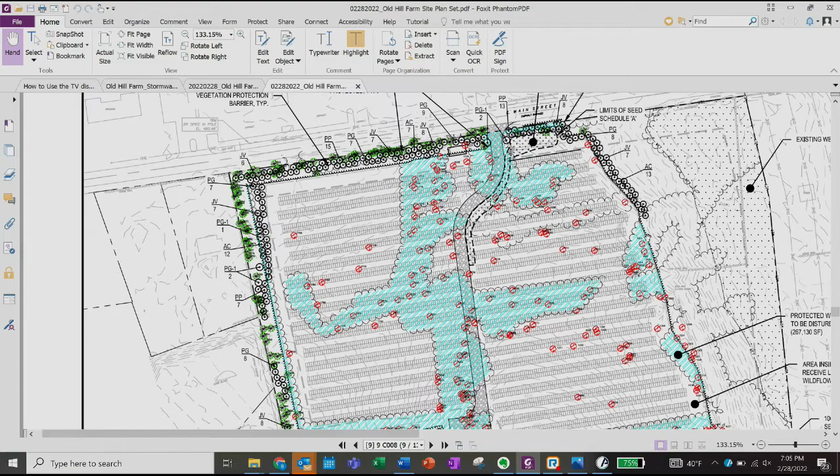This came out of a discussion with John Tegeter. We spent a lot of time going through the site sections with him, looking at the site sections, figuring out the height of trees that we would need, and what kind of trees.

So in that corner, we did a site section where there's an enormous amount of trees under the power lines, like 76 feet of them, that sitting here today would probably block that view. But in talking to John, we're trying to accommodate for the what-ifs. What if those trees fall over? What if they die? Who's maintaining them? So we are looking at needing greater height in that area.

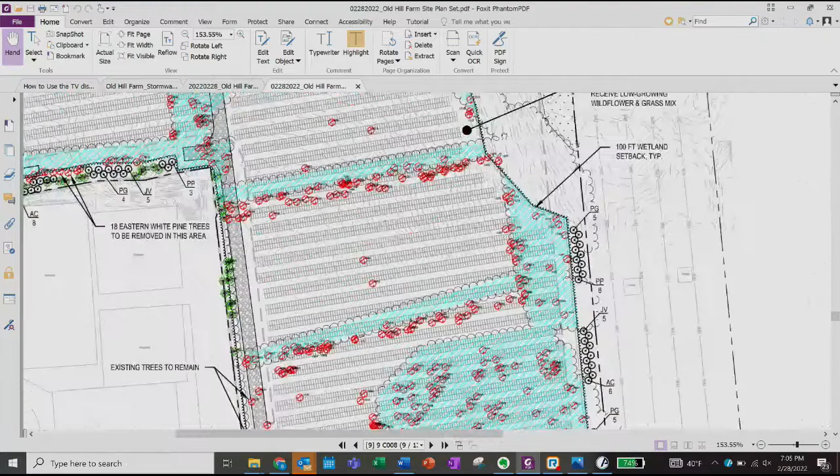So we've added the green giant arborvitae, which grows at approximately 18 inches to 2 feet a year, and we're proposing to plant 12-foot trees, which should hit a height of 21 feet in about 5 to 6 years. That's down in the corner over by the intersection of Hill Boulevard and Route 6, basically behind the shop where the Carvel is.

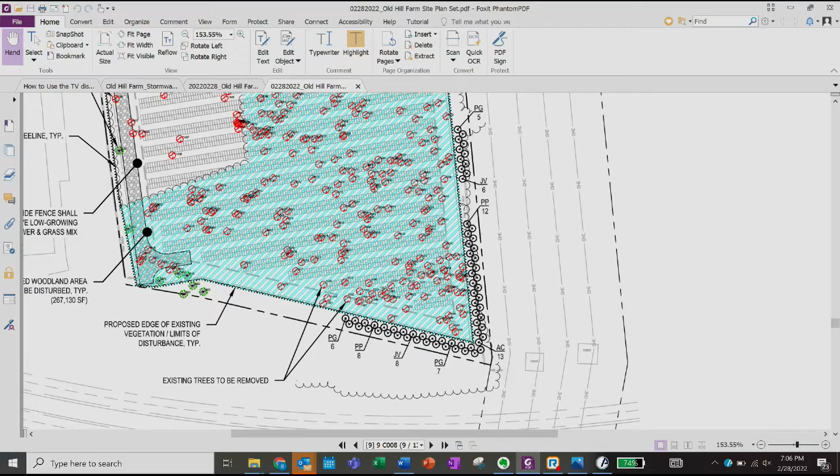We've also talked about moving some trees on the outside of the fence, at the wetland buffer, because that will screen the fence. The privacy fence is 7 feet, but we're also thinking of planting much higher trees there too, 8 to 10 feet, to screen that, and perhaps put some native shrubs in front of those trees to soften that, because that's close to - if you're standing on the bowling alley parking lot looking that direction, that's what you would be looking at. So we thought it'd be better to move the trees on the outside of the fence rather than the inside, so that screens the fence from the property.

But that's a long way of saying that we spent a fair amount of time with John going through the various site sections, and we have, I think, one more where we're just going to go there in person and see what needs to be done. And we have a range of native shrubs plus the 4 that are in our original planting, and now we've added the green giant arborvitae.

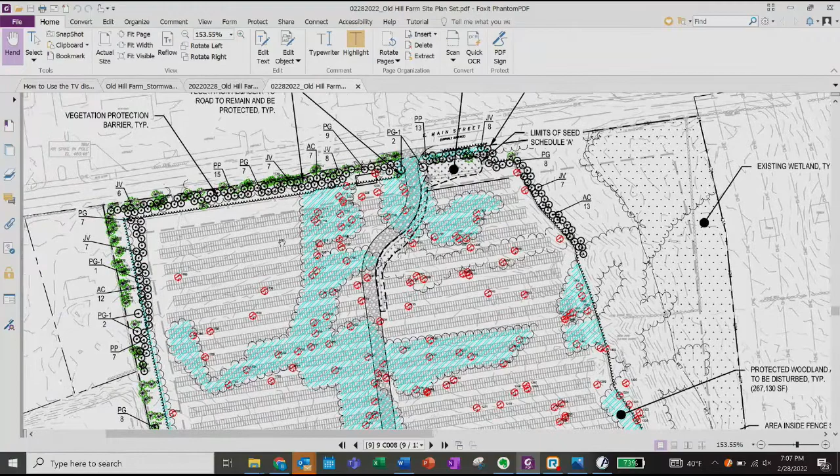And so we all recognize ourselves, the planning department, the Sheehys, that it's an art, not a science. So when we in fact stand there, we're going to have to maybe make adjustments, but we're all on the same page in terms of what those adjustments need to be.

The other issue that Mrs. Sheehy brought up at the public hearing had to do with stormwater, and we sent an email to Mrs. Sheehy and her husband with copies of the pages from our SWPPP with the drawings showing that the elevations are such that there shouldn't be any erosion problem, and I provided those same documents to the town engineer for him to look at as well.

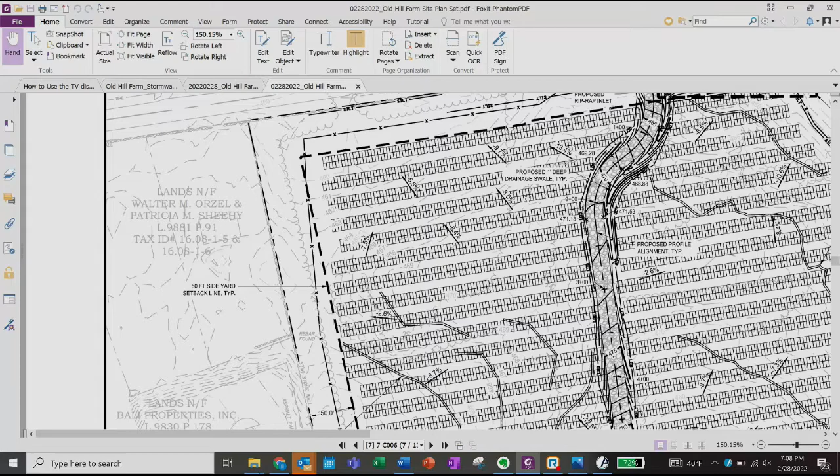The last change on our site plan, other than what I call the Sheehy changes, was we've gotten feedback from Con Ed that we have to put in transformer pads - it's required equipment. You can see right there, it's a little pad. They tend to be 3.5 to maybe 6 feet. You can go low and wide, or high and skinny. We'll get the exact requirements from Con Ed.

But basically that's needed because it's near the box where we would hook into the Con Ed system. And that will be fully screened because there's a fence in front of it and then all the tree planting that we've talked about before. So no one will ever see that, and it does not produce noise, so no one will hear it either. You've seen them all around town - wherever you see these little green transformer boxes, that's what we're putting here. We have to put one there and one in the back, so I don't think that will cause any additional disturbances to anyone.

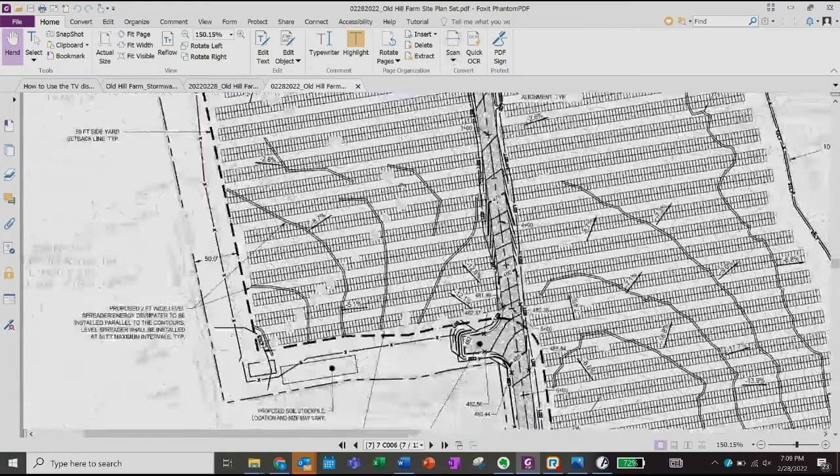So given all of that, I think we've gotten everybody - hopefully we've addressed everybody's concerns: the tree commission, the conservation board, the planning board itself, our neighbors. So we're at this stage where I think we're in a place where there are no adverse effects, unless John has other outstanding issues he'll let us know. But we're hoping that we can get a negative declaration from the board at this point in time.

Am I in the right place, John? Yes. Okay, did you submit the materials that I have, and I think my colleagues have at this point? They don't quite reflect the latest - this is new changes.

Just wanted to make sure this will be fine. If we'd had access to a big printer, I would have brought it with me today, but we didn't, so that's why it's on the screen. But this is the plan, and it's been emailed to the planning department, and they will get hard copies tomorrow too.

Do we need any other referral or feedback on these, or are we in a position to make the necessary findings ourselves right now, based upon the new submission? I think you're in the position to make that determination. Everything that we've gone through here, I think, has shown that we are able to mitigate such things as the view sheds, the stormwater.

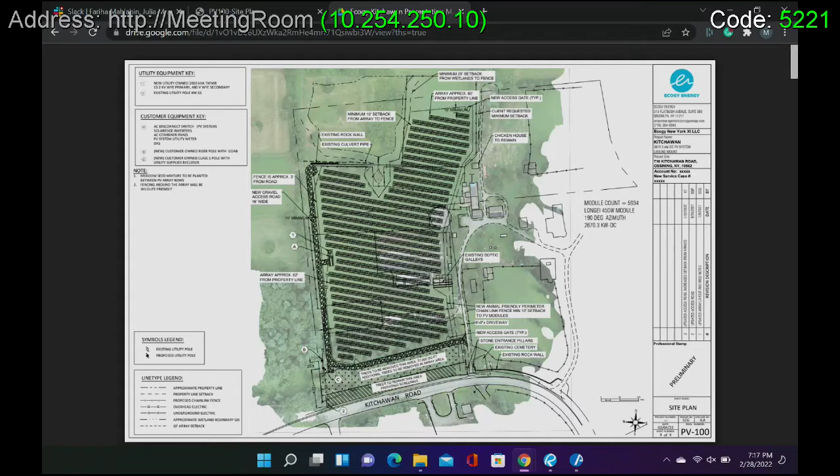We had a meeting with the Conservation Board on February 16th. We received additional memos from the Conservation Board and Tree Conservation Advisory Committee. Ecogy, along with our stormwater engineer, met with Dan Ciarcia last week to discuss the stormwater measures. We've also submitted our MS4 permit and the associated fee to the engineering department, so all that paperwork has been filed. As a result of all those meetings and memos, we're working on a few final items.

We're improving our stormwater management plan to include level spreaders. That was the biggest feedback from our meeting with Mr. Ciarcia. The proposed stormwater management plan already meets the DEP requirements for the city, ensuring zero change or improved peak flows post-construction. But the concern was there wouldn't be the same type of flow over the ground area underneath the arrays. The level spreader should address that, spreading out stormwater and ensuring it's either infiltrating or being caught and directed toward the new stormwater catch basin.

The Conservation Board expressed some concern about water quality with that catch basin, since it's very close to the wetlands, and were concerned about overflow into the wetlands. That should not happen. The stormwater engineer has sized the basin so there's no overflow in the extreme rainfall event, which in this case is a 100-year rainfall event. So it's sized for that extreme event, and we don't expect any overflow there, so no water quality concerns.

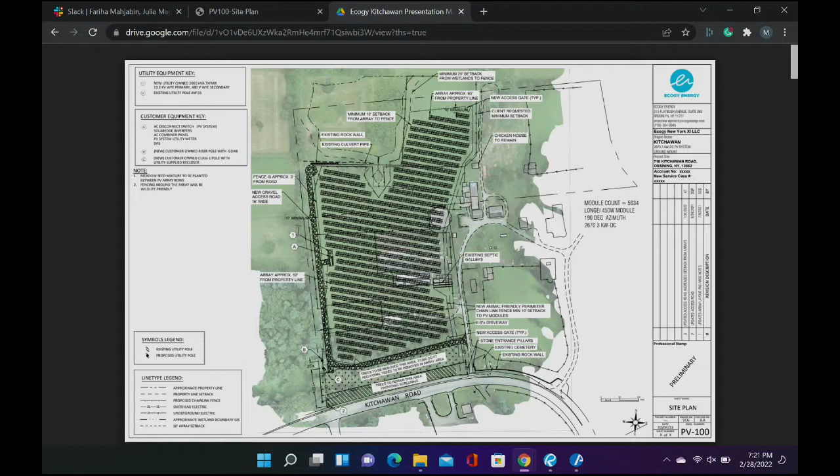Sure. So from the wetland to the fence around the array is 25 feet. Then from the fence to the beginning of the panels is either 10 or 16 feet, depending on which side you're looking at. So it's either 35 feet or upwards of 45 feet, depending on which side of the wetlands. That was raised with the Conservation Board at an earlier meeting. They said they would defer to the DEP ruling on whether that's acceptable. The DEP at their site visit had no concerns because they don't consider the fencing or panels to be a significant impervious surface addition in the wetland buffer. So we don't anticipate that becoming an issue, but we have not been able to go through DEP review yet, so not certain.

Okay, and the Tree Commission's memo of February 18th, I know you covered a number of points this evening. Are you going to respond formally to their concerns and put forth another memo of your own? Yes, we're waiting for the updated landscaping plan so that we can submit all of that at the same time, but yes.

Okay, any other concerns? Where are we at now? We're at the end, finally. I think we'll draft up the resolution and the wetland permit and the stormwater permit for you to consider next time. We'll probably have conditions such as the screening plan to the satisfaction of you guys, which means we'll double and triple check before it comes back to you for signature, a set of plans. Sure, and we'll work with them closely, and I'm certain we can do this the right way, but since these are the first ones through, and that's such a prominent part of it, I want to make sure 3 and 4 times. So it'll have conditions such as that.

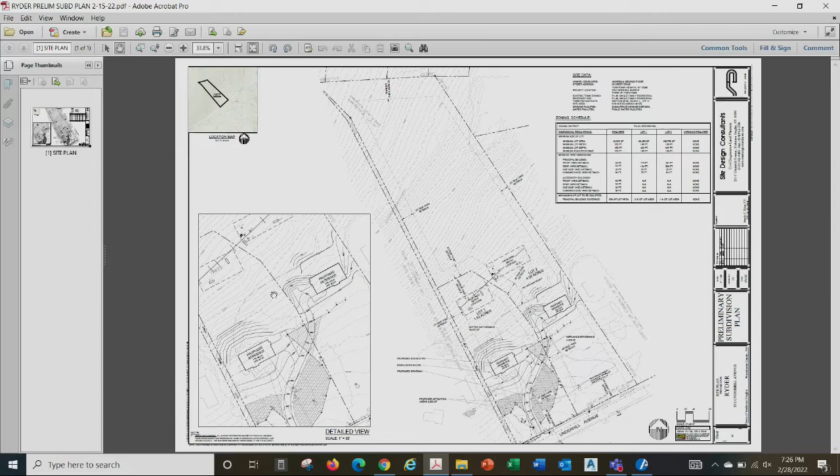So this is the plan we went with. At that time, we didn't have a mitigation plan or whatnot together.

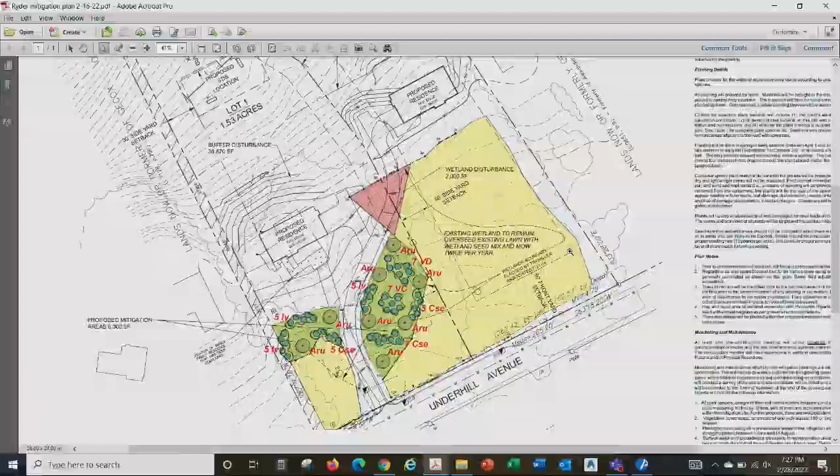Since then, Steve Marino from Tim Miller Associates has put together a mitigation plan. Unfortunately, he's not able to be here tonight to get into the details of it. But in essence, if you recall the site, this area in yellow, which is the wetland area, has over the years been a maintained lawn area for the original residents, and it gets cut all the time. So what Steve is proposing is to overseed it, do some tilling, overseed it, and let it naturally become a wetland area again. It'll take several years to achieve what it needs to do, but that's the plan, and he'll be able to explain it the next time we're together. At this point, the only thing we're looking to do is get a PIH set for this, and we're good to go.

No reason not to. No issue. The next one would be on the 14th of March.

Is this the one we got the notice for? Let's just take a motion to ratify the advertising of this for the 14th, because it actually happened, otherwise if we waited till today we wouldn't have made it for the 14th. So, authorize and ratify the advertisement for a public informational hearing. Motion? Second. All in favor? Aye. So you've got the hearing on the 14th, thank you.

Did the Conservation Board see this? Wednesday night. Oh good, we'll be there.

Any other concerns or comments from the board? John? Not at this time. Okay, that's good.

Number 6 on the agenda is Martino Landscaping, located at 286 East Main Street. It's an application for a site plan and subdivision.

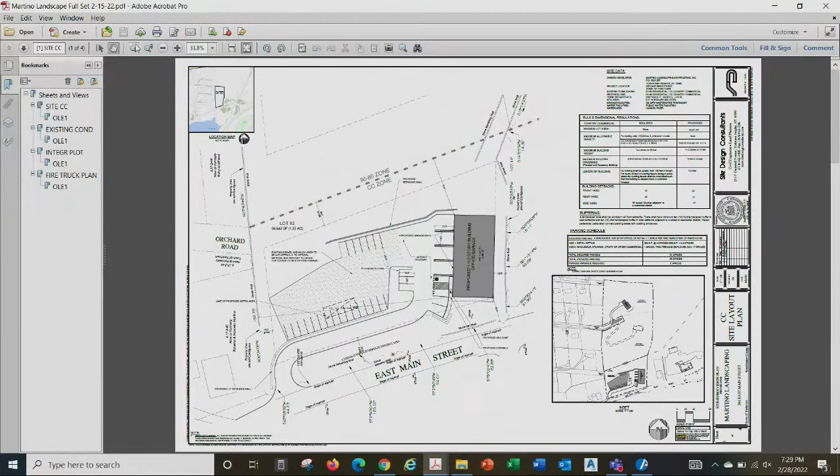The last time you officially saw this, it was a more aggressive plan. It had 2 buildings on it. The main building was much larger than the one we're showing now, and the building was turned parallel with the street. Again, it was a larger building off in the northwest corner of the area zoned country commercial, and there was a second building. The owner has since decided he didn't really want to go that big, and he was looking to do something smaller in size, which is the plan we've come up with here.

I'm sure you all know Martino Landscaping, you see their trucks all over the place. They do most of the lawn maintenance in this area, so this is the base of their operation currently. There's a small building there now that's really not suitable for what they need. This will give them space to store equipment, to service equipment, supplies and whatnot.

So the driveway comes in on the west side of the site here. It parallels the slope and makes its way up. As you can see, there's some parking here. They're going to have a small office for the operation, and then 4 garage bays, which are divided by those cross-hatched areas that you see there. As you get around the bend to the west, there's some parking that's going to be a gravel area, for the workers when they show up in the morning—that's where they'll be parking.

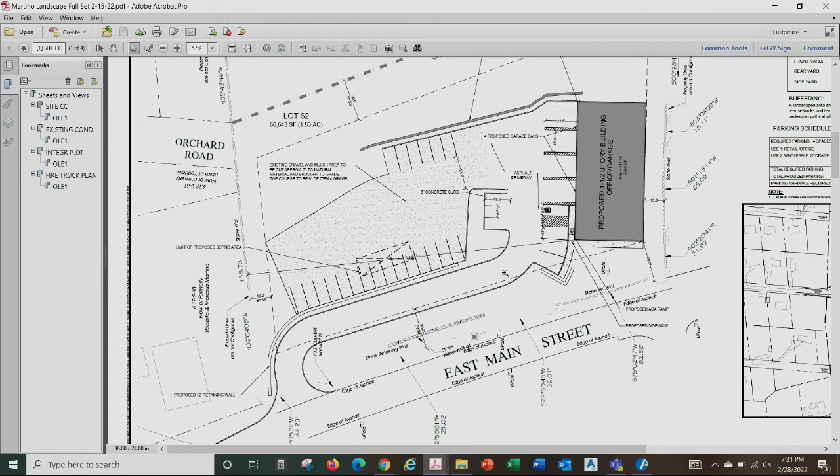In order to make this work, we will need a variance for the slope on the driveway, which is a town board action. What's your grade point? We have 8%. Where 5% is what's required on a commercial driveway. 8% is okay for a town road, but not a commercial driveway. So with that said, we're going to need a recommendation by the planning board for that variance, when you see fit to grant it.

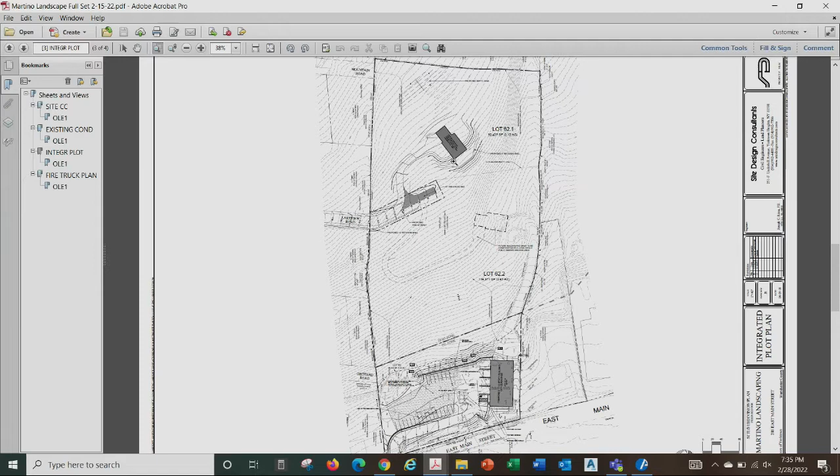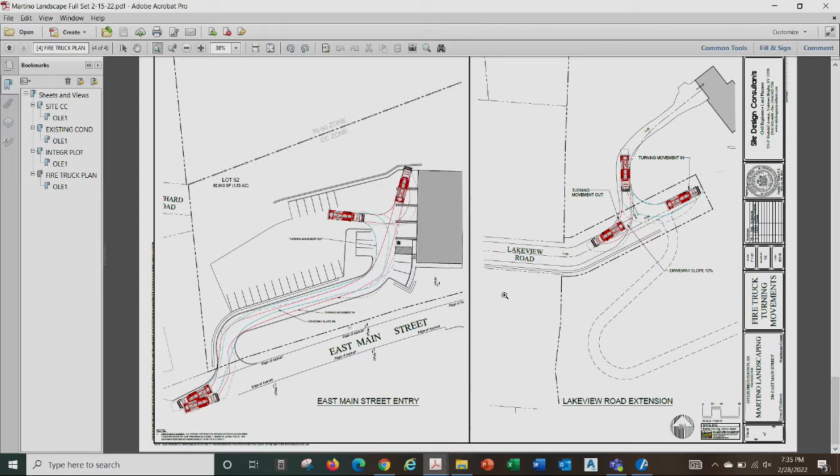We received comments from the Fire Commission. They wanted to see how fire trucks would be able to access the site, the commercial site, which we're showing here on the left, and also to provide a suitable turnaround if the residential lot is developed off of Lakeview, and that shows the turning movements there. I don't know if they've reviewed it or not, but we haven't heard anything at this point since we've submitted this revision.

To give you an idea, and again it's not the prettiest thing, and I'm not thrilled with doing this, but from the perspective of not losing the residential lot, we would still use the same septic area. This red line here would be the division of the two properties. This property would be the commercial property, and this property on the left side, connected to the upper here, would be the residential property. There would be common easements going through the two properties for access and for parking.

We would bring a driveway in up along the slope here, up an existing traveled way right here now. We would follow that between these two stone walls and end up at a potential house site up here. So this meets the frontage requirement of 200 feet for a single-family lot in the R1-80 zone, and we meet the coverage maximum for a commercial building on this site. So at a quick glance, it looks like we can make this work with this crazy plan.

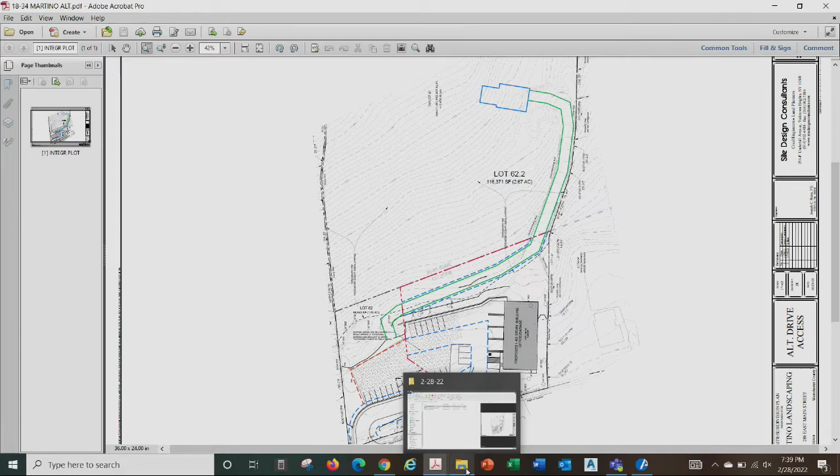What's the grade of that drive as we stand now? Is it meeting anywhere near code? Which drive, John, the travel way that you would propose? Yeah, I think I have. Well, what can you get in there? Can you get something anywhere close to code? Oh yeah, yep. I don't have that, but we do meet—we do have a driveway that makes code.

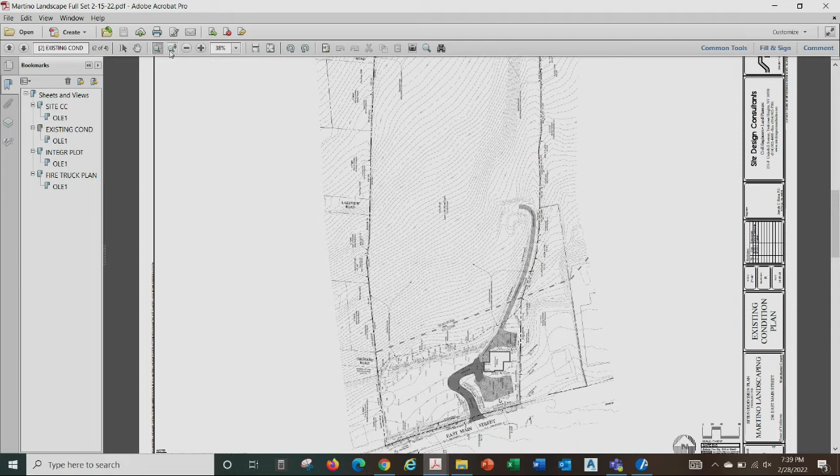This is the travel way I'm talking about, right here—yeah, this one here. Is access via Lakeview your preferred way? Oh, no doubt, yeah, yeah.

Well, it does two things. It makes it easy access. Number two, all we heard the last few times, and we heard it from the fire department—the town has no way to turn their vehicles around there, the fire department has no way to turn their vehicles around there. They want us to provide a way to turn, if we're doing our plan, they want to be able to turn around the vehicle, which is what we demonstrated in that other plan. So to me it goes beyond just which is the better access—it also provides Lakeview with a safe way for fire trucks to turn around, or even town highway department trucks to turn around.

Large vehicles, nobody can turn around up there unless you've got a small car. Otherwise you're going into everyone's driveway. So you're proposing that the town trucks and emergency vehicles will have to extend the right of way into the property, but the turnaround will be via the driveway of one or both of the residences, is that right? Yep. That's no different than what we have now. No different, right.

Have you looked into doing at least a hammerhead? That is what we're showing—a hammerhead. We could make that first part of the driveway part of the town right of way, but that is a hammerhead as per the fire code, as prescribed by the fire commission for us to follow.

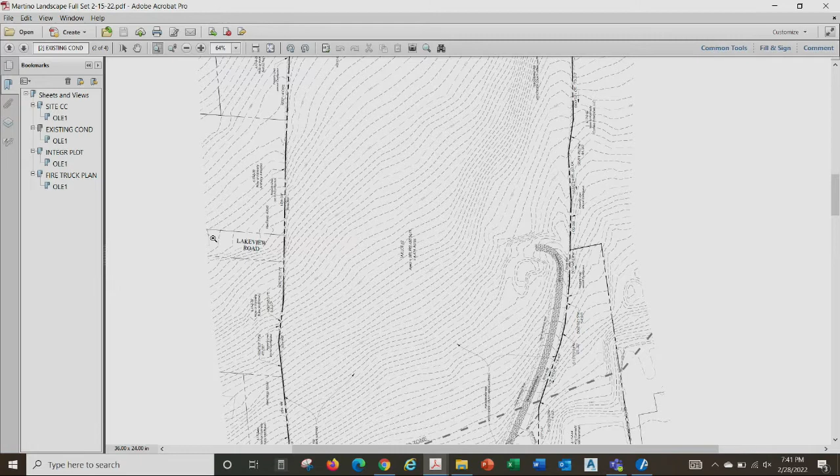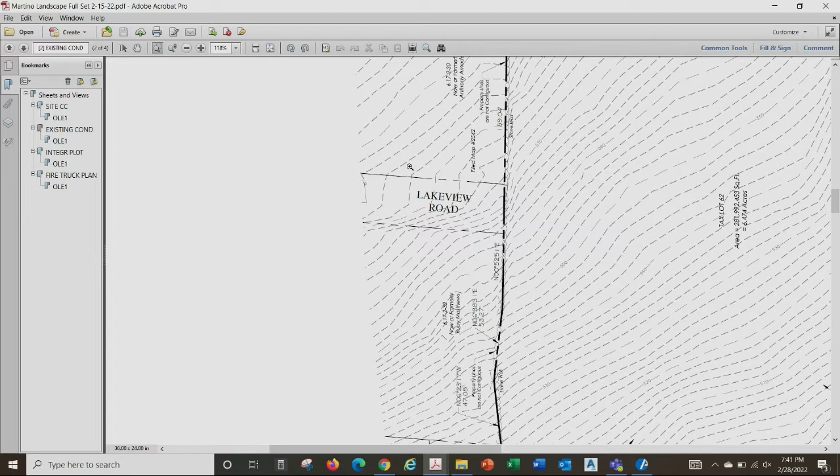Who owns the adjacent parcels on Lakeview? Do you have that on here? Yeah, it's on there. It's not your client? No. It's Anthony Amadeo who owns that piece, and of course we don't show that 10-foot reserve strip because we didn't know about it, but apparently the surveyor didn't pick it up either. So Anthony Amadeo owns the piece on the north side of Lakeview, and Matthews owns the piece on the south side.

One of the concerns I expressed earlier was the streetscape along East Main Street there. I don't know if there are any long-range plans or considerations to enhancing the community aspect of that area under the overlay district, but I would hope there could be some potential for a sidewalk or some kind of development along there that would be more cohesive than just putting a warehouse type thing in, or at least give some consideration to what might be happening in the future along there. That's a concern I have in a general sense. It may not affect what you're doing up the hill, but along the bottom adjacent to the road it needs to be given some thought.

Is there enough room on the bottom to put a 4-foot walk, to extend the sidewalk? Yeah, the area is there. And it looks like there's a pretty good shoulder there along that side—looks like there's a pretty nice looking rock wall. Yeah, there is. That's kind of covered over with a bunch of stuff.

About the streetscape—yeah, that whole corridor is foremost on the town board's mind as far as what it looks like, and we're listening. Nice, yeah.

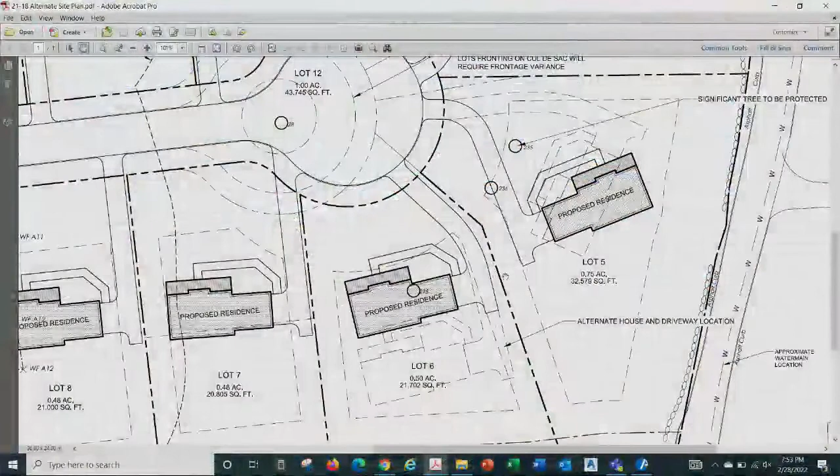If we put the garage here, you mean, John, or flip the garage on that side? Yeah, flip the house. That's a possibility, we could do that front loading - maybe not so bad because I think you're going to be downhill, right? And if you stay rotated, being on the other side of the house, they won't have the same negative effect, so maybe that's a compromise that's worthwhile. That's fine - which one's 5 that you're talking? This one right here. Yeah, that's no problem, John.

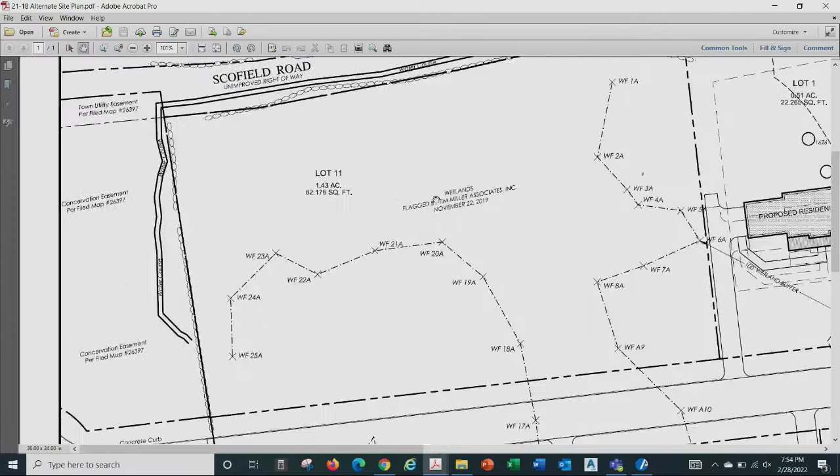Lot 6, you could see what we're doing there - maybe we don't have to push the house as far back as we have it, because it essentially leaves no backyard. And let's see what that tree is - a 44-inch catalpa.

So that's what we're looking to do. And then the last one is this one in the center of the road here, which is a black walnut, 35-inch black walnut. In order to save that, we would have to pull the cul-de-sac back, as we're showing here, putting a center island in and getting the tree in the center island in the middle of the cul-de-sac. Doing that will require some frontage variances on these lots, specifically lots 4 and 7.

So we would need a recommendation from the planning board to go to the ZBA if that's what you desired, if you want to try to save that black walnut. Anybody determine if they're healthy enough to? Steve has singled these trees out that he would like to see us protect. Most of them we can accomplish - it's this one in the roadway that will require a little bit of a change or a variance.

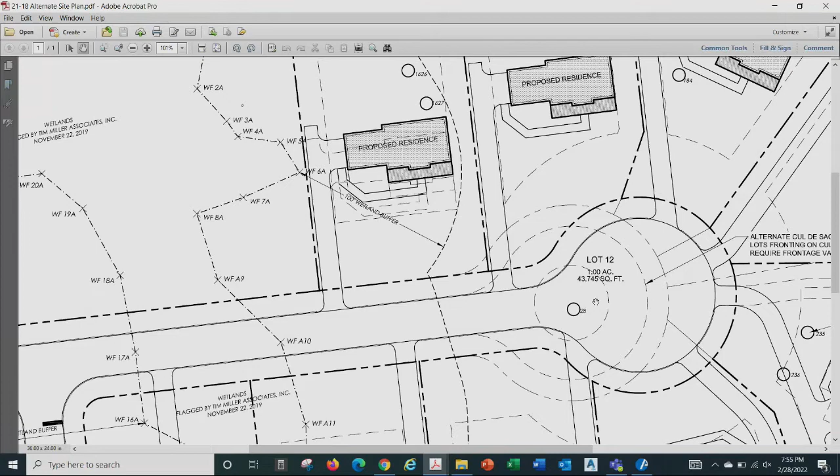Any comments or questions? I think if they could save the walnut, I would go for that. It's a valuable tree. Not while it's standing, no.

One of the questions the planning department set in front of us to consider tonight was whether or not we want to make the connection with Shelley Street. I was thinking about that - I used to live in that neighborhood off Judy Road. As I was looking at how the wetlands are being handled and the impact of having that connection, if removed, it would isolate the two neighborhoods and prevent through traffic, which some people talked about at one of the hearings.

It would also remove some of the impact on the wetlands if you could move one of the houses over a little bit, where the road was, number 9. It would offset some of the wetland impact in addition. So I don't know how the board feels about something like that.

I get your point. Then the house on number 9, we could slide to the west. It would not eliminate any road impacts on the wetland, but just this one here is what you're talking about. It might give you a little more flexibility in that section to spread the houses out a bit.

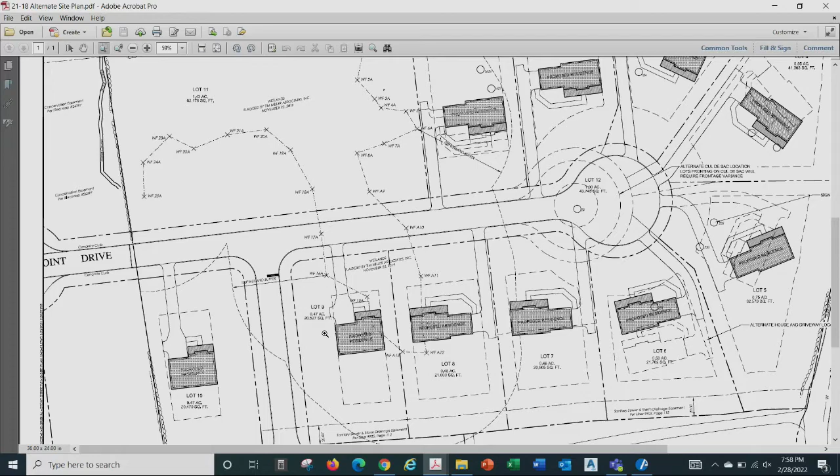John, what considerations are there with that connection? I know at one point the town wanted to have interior connections to relieve traffic on some of the main streets. That's one of them - it's to relieve traffic, to have a network where you have choices.

The people on High Point Drive will now get all 12 units coming down their road. The other thing is there are recommendations - I don't have the numbers at hand right now - in terms of the length of a dead end. You don't want to produce something that is too long as a dead end, where you only have one way to get in case of a dire catastrophic emergency in which you're precluded from getting down the road. I think it's 1,000 or 1,200 feet.

Yeah, something in that neighborhood. How long is this? I don't know. Well, you would start from the beginning point of High Point Drive - that's where you would measure from. So that's something maybe some research should be done on, to make sure it's not going in a direction that doesn't make sense, which is one of the reasons for the eventual connections left on either side of this, on 3 sides of this piece of property.

Do you want to pursue or consider that? About eliminating Shelley? I think so, depends upon the distance. How does the applicant feel about that? He said he doesn't mind either way, really. Okay, whatever.

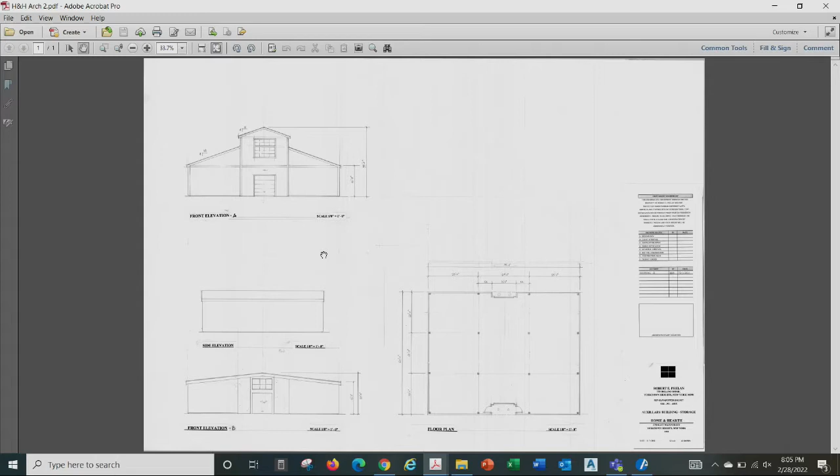So you can see he's doing something a little interesting with the center portion of the roof, to give it a nicer appearance, because you're looking straight onto it from Route 6, right? The earlier iteration was the one below? Yeah, I think so.

Yeah, so anyway, that's where we're at. We don't need to go to the zoning board. I really wanted to be here to have Steve Marino fill you in on the wetland aspect of this.

Which reminds me, two things I forgot to do. The town consultant has been authorized to review this on Grassage, which I didn't show you, but we submitted a mitigation plan. On Ryder, we need to have you ask the town consultant for proposals on those two, to review those projects.

For which one? That's got to go to the board, right? Grassage. Well, if you would like to do it, then we'll send it to the town board to authorize. So why don't we develop a memo back to them? Okay, yeah, good.

Okay, that's it with it. He did file an application with the DEC on this. Our next move on this is to get a public hearing set up. So I would assume that you want to at least get the input of the environmental consultant before we move to a public hearing. So I'm not going to request that tonight. And that's it, that's all I have.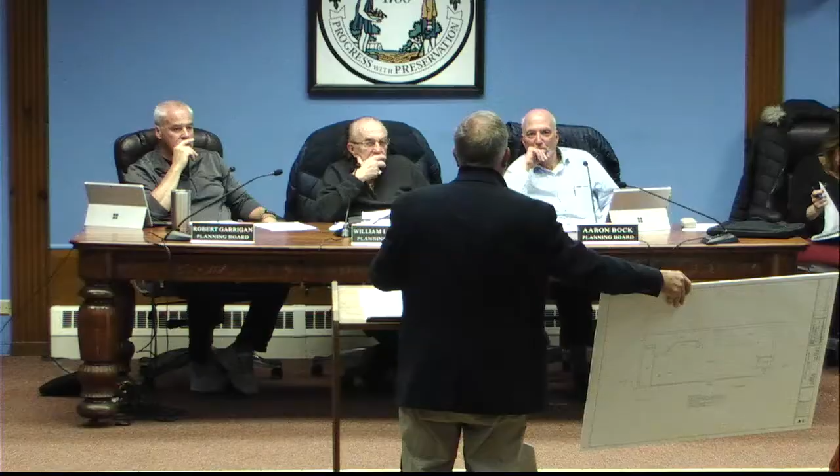So essentially what we want to do is the repair, but the repair we want to essentially take off the overhang too. There are green panels on the building now, and those would be reused except for the ones that are damaged. So we want to essentially put that back together. Right now I believe there are still tarps on the building, because it has to go through the process here.

We do have your board on a referral. We're going to architectural review tomorrow, and then conservation on Wednesday too, for this. So what we're hoping to do is get a simple recommendation from your board to do this work so we can make that change and avoid having the overhang damaged again.

So this is a neighbor of the guy we just saw, right? I believe so, yeah. So this was a Mobil station, correct? At one point it was a Mobil station, BP. But what I can do, if I can just show you, it's the far corner, you can see it on the stick, so it's the far corner that trucks keep coming through and flipping.

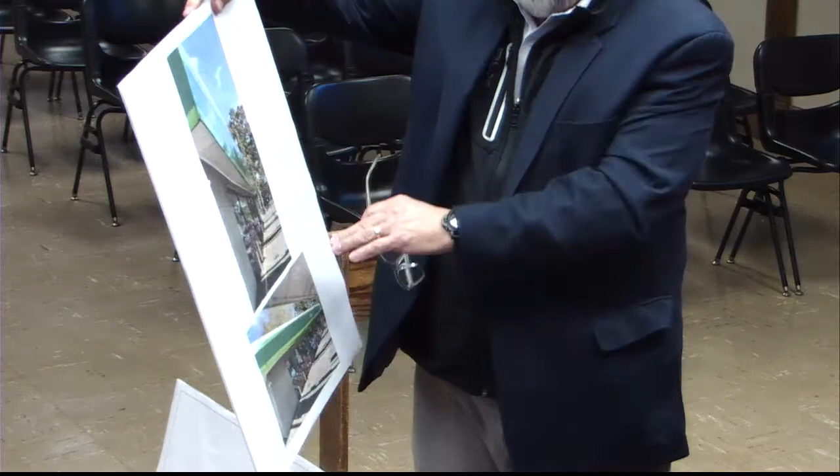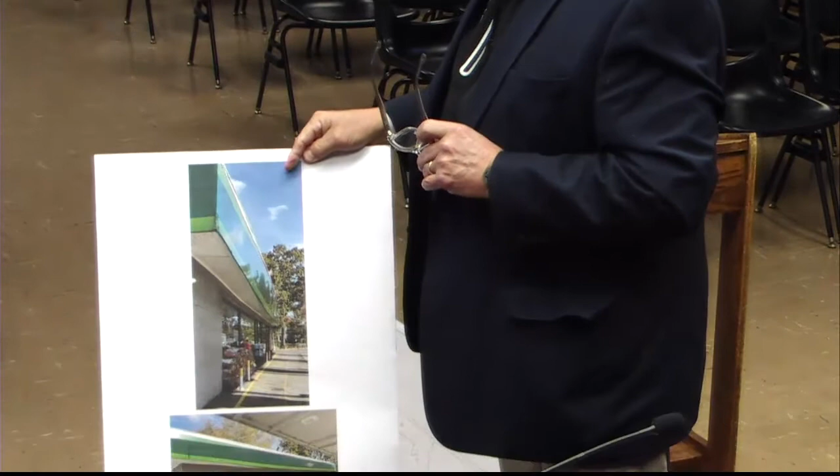Yeah, you know why? Because whoever owns that never built this site plan according to the approved plan. I've seen it, it's a mess. Where they come in, they come through right there.

The yellow hatched area should be a sidewalk with a curb. That's my sense of it. I believe the town board has jurisdiction over the approved site plan. So what we'd like to do now, driving by this all the time...

Again, with your recommendation, we need recommendations from architectural review and conservation too, since there's a wetland in the back of the property, so we'll appear before them. The goal is to take the tarp off and make the repair. They've hired an architect, and hired our office to help them with this too.

The building inspector said this needs to come before the board. They started making some changes out there, but the building department stopped them. We have to go through a process, so we're here just asking for your board to move this through with a recommendation to allow us to make those changes.

Long-term, I've had discussions with the client that they actually plan on making significant changes to this property, possibly demolishing that building, moving it back, and other changes too. That's in the offing right now. We haven't been asked to prepare formal plans for that, but right now we'd just like to get this cleaned up and looking decent.

Just modifications to the building? Yes, just a modification to the building, not a rebranding. In terms of the immediate repairs, they'd be putting those green panels back. There are some damaged ones, but the look of the building is going to be essentially the same.

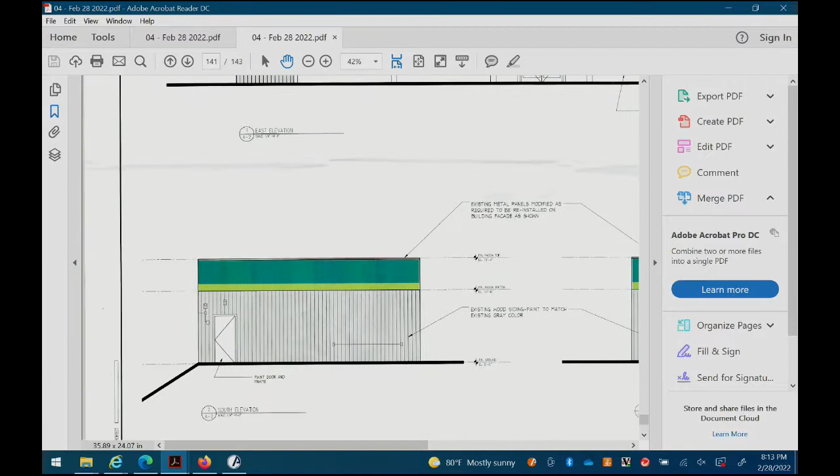That's always good. So I'm seeing, when I look at these elevations, there is virtually no overhang whatsoever, it's 2.5 inches. So the trucks will hit the building instead of the overhang. It's a tight turn. Well, because the canopy over the pumps is high enough, obviously, that's pretty much why.

Listen, they ran into my building 4 times already in the last 10 years. Okay, any other comments on this?